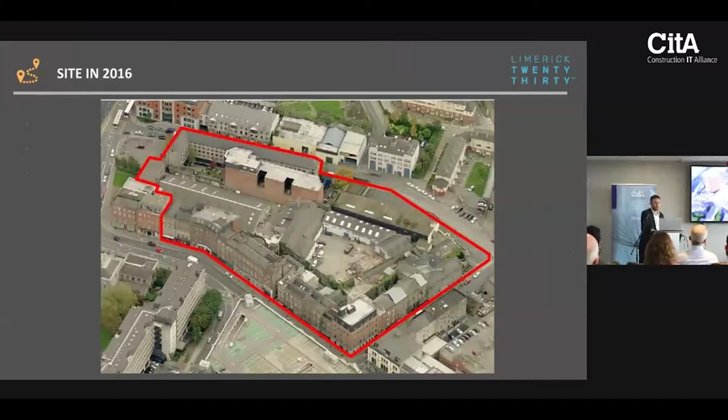In terms of how it's divided up, we're actually delivering it in 5 different contracts. The first was a demolition enabling package. The second, which is on site at the moment, referred to as Contract B, is the construction of a site-wide basement, 10,000 square meters, and a 6-story office building, about €90 million construction value. Contract D, which has skipped ahead of Contract C, is the 14-story building and refurbishment of the granary, circa 80 million. And then Contract C, which is the library, 4 Opera Square, and the public realm plaza, about 65 million. For C and D, the intent is that they would be on site by the end of the year.

Just a note in terms of funding. So where's the funding for these buildings coming from? We've got about a third of the funding of the 300 million coming from private investment.

About two-thirds is coming from either local authority or government. Effectively, it's complex — my role involves dealing with all the different stakeholders on this site.

We've got five stakeholders. We've got ourselves, who will manage the sites when finished, and we're a 50% part of a joint venture company called Treaty Stone, a partnership with the Irish Strategic Investment Fund, who will fund and own the 6-story office building. The library is the council, the granary is the council, and the 14-story building is the Revenue Commissioner, so it's a government building. Lastly, Contract E is a hotel, which takes in Quinn's Bar and a number of Georgians on Ellen Street and Patrick Street, and that's being delivered by a third party.

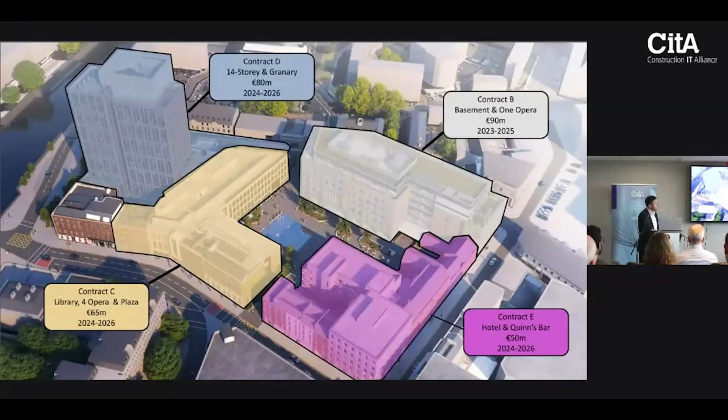So just to delve into a bit more detail — I noted I only have 15 minutes, so I don't want to go too far over, but let's look at the individual buildings, starting with the 6-story office building.

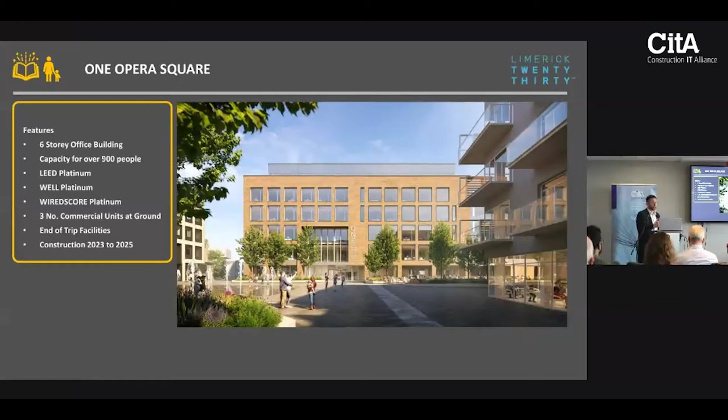It's about 10,000 square meters net and can accommodate over 900 people. We're going for LEED, Well, and WiredScore Platinum, and we're on target to reach that. We've also got commercial units down on the ground floor, level 3 of them, which activate the public realm — an important part of it. That's another visual looking across the square.

In terms of the basement, we've got 155 car spaces and 17 EV charging points, but actually full EV charging can be accommodated across the whole car park if facilitated. There's plant space and ancillary space for the buildings above, and probably three important things in terms of sustainability, showing the ambition of the development.

End of trip facilities — everybody knows we need to start moving away from cars and support walkers and cyclists. So we've got about 311 bike storage spaces down in the basement, with really high-end end-of-trip facilities: lockers, shower rooms, a centralized waste management strategy, and a goods delivery strategy.

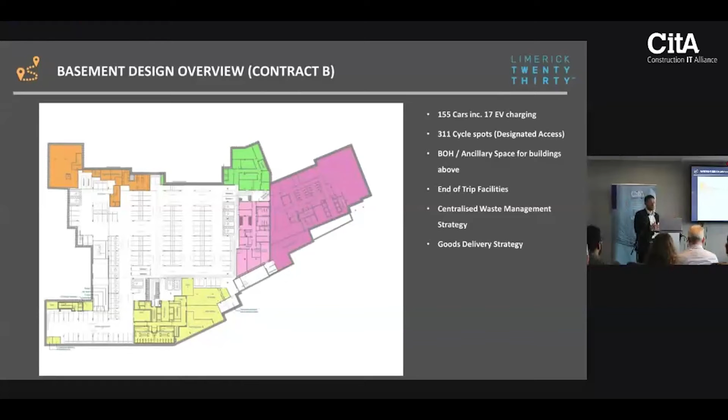From a waste perspective, we don't want bins on the street. We want them taken down into the basement, stored there for a time, then moved into the service yard so they're off-site by 6am and nobody's looking at them. Similarly, the goods delivery strategy is about mitigating congestion on the streets.

Probably just stop on the granary for a minute. It's the oldest building on the site, from the 1800s. We're keeping that building and upgrading its energy performance — replacing all the windows, repointing all the stonework, replacing the roof with insulation added, and putting in a new heating system throughout.

That's going to accommodate the council — they're going back into that building. You can see a nice view of one of the restaurants there, which has a sunken terrace outside. Anybody who frequented Trinity Rooms back in the day would be familiar with that area.

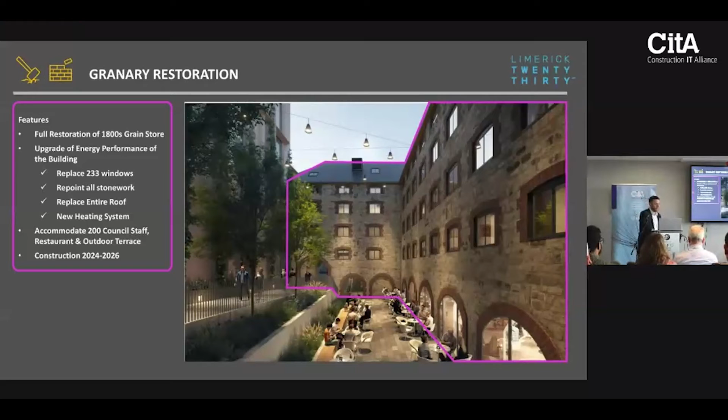In terms of the city library, it's another really good example worth touching on. We're delivering turnkey, so it's a full fit-out of that building, at 4,700 square meters — pretty big, and it's going to be one of the biggest libraries in the country.

I've got a video giving some insight into the level of detail in it. An important part of it is restoring the old town hall building, from the 1800s, and a couple of Georgian buildings, 8 and 9 Rutland Street, which have been really, really challenging.

But what we've created blends the new with the old, and the architects, Henry J. Lyons, have done a fantastic job. They're building an atrium to the rear, but it's a really impressive design, showing what you can do with a sympathetic approach to blending heritage with the new.

That whole development will have an event space for 100 people. There's community and sensory rooms in there, a cafe and outdoor terrace, and a dedicated children's area up on the second floor.

One point to make about the City Library - some people mightn't get excited about that, they think it's a place you just go to read. It's not. This is an international standard library, a place you'll want to bring your kids, or go yourself. There's recording studios in there, so it's something for everybody. This is a destination where visitors come to the city - they will want to go to this library. I think we're really proud of the design, and now it's about making that a reality.

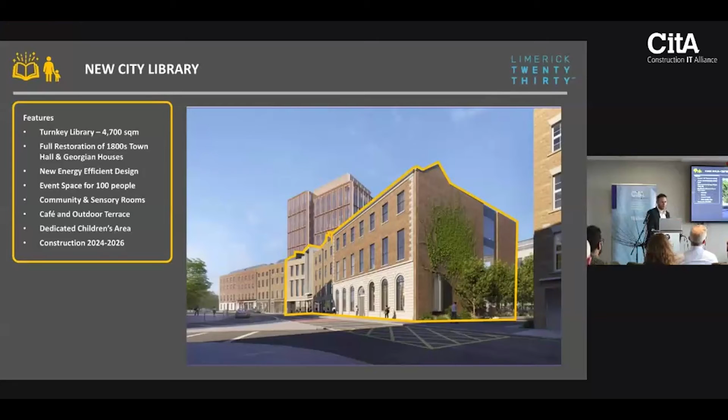Again, public realm is a really important part of it. We've got about 8 or 9 restaurants and cafes backing onto this square. It's really unique, I guess - it is an internal square. You don't get many of them in Ireland. So you will be sitting here and...

Bad timing. So yeah, it'll be a fantastic place. You'll be separated from the cars around you, and it's kind of a bit like Rome, not exactly, but a bit like Rome, where you walk into one of these squares and there's a big reveal behind the buildings. You don't really realize what you've got until you walk in there. So we've got lots of planter beds, lots of places to sit and enjoy the space.

One of the key features - we've got a mirror pool. Anybody that's been up to Dundrum or over to Granary Square in London has seen this - a thin layer of water with playful jets, synchronized with music and lights. That's just an attraction to animate the space.

But an important part of that is it can be drained down, and we can use this space for concerts, for markets, for outdoor cinema, and it's actually earmarked as a fan zone for September 2027 for the Ryder Cup as well. This is the part of the scheme that really excites me and excites Limerick 2030, and it's one the public should look forward to.

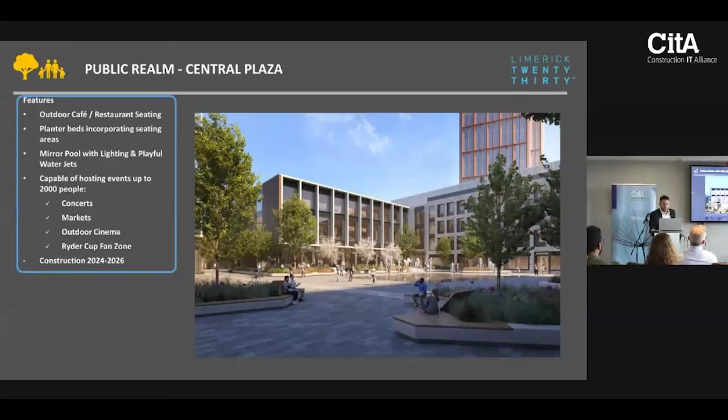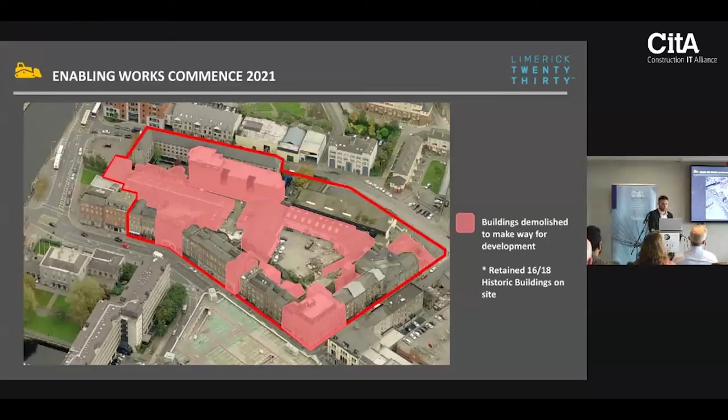That was the works - work started in 2021, and by the end of 2022 that's how the site was looking. An interesting fact: any demolished material was crushed and spread across the site, about half a metre of it, as a capping layer to give a clean surface to start on, and it's since been used for piling mats and other uses. So we tried to divert from landfill, which was pretty successful in that first part of the project.

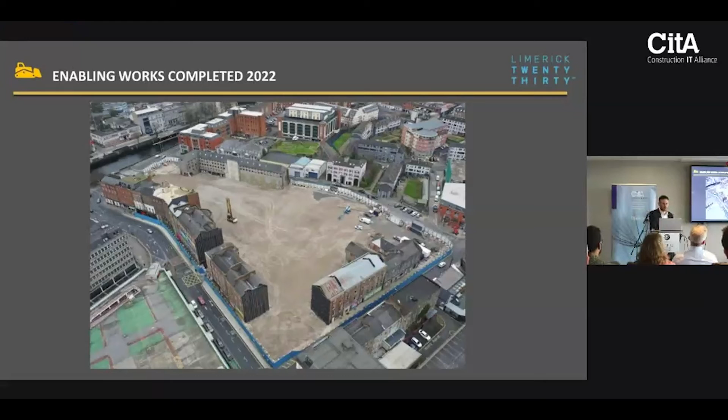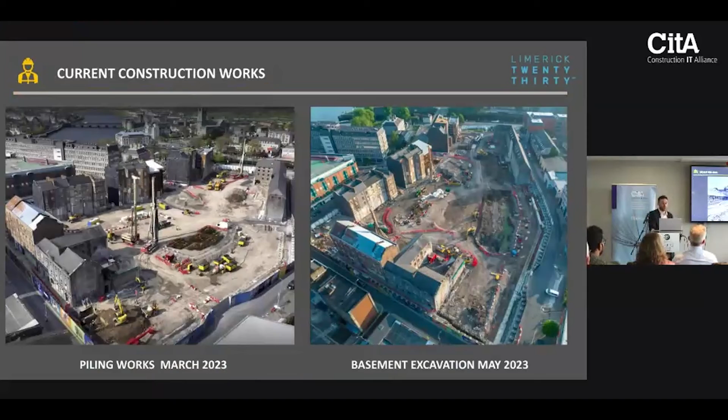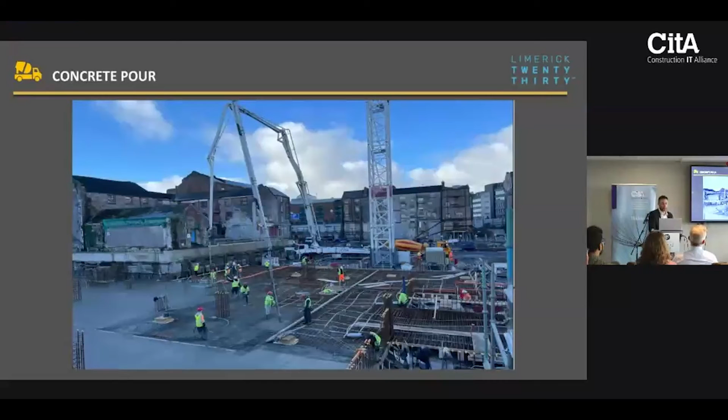That's just a view of the secant perimeter wall, which is about 4.5 kilometers across the site. That's a view of a concrete pour - we've got a post-tension slab across the basement slab and podium slab. A huge logistical challenge for the contractor to deliver - there was about 900 cubic meters of concrete poured in one day.

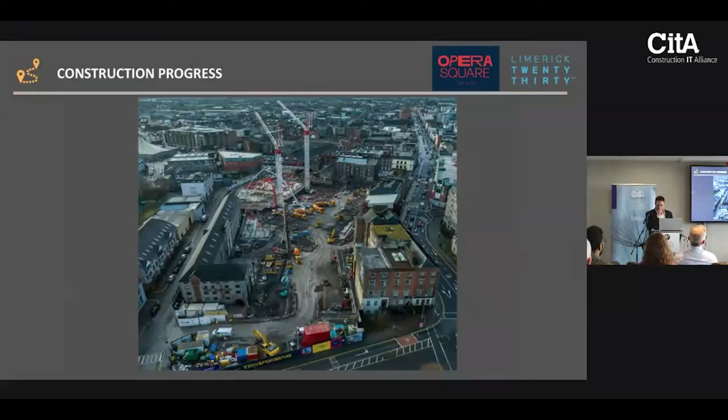We've got a local provider, O'Connell's, bringing the concrete in from 6 o'clock in the morning till 3, then floating it off - we've had people down on site at 3 o'clock in the morning floating off concrete. So, pretty successful so far, and that just gives you an idea of the level of activity.

So in terms of what we've actually completed on site, we've got 4.5 kilometers of basement perimeter piling done, over 800 piles. We've got most of the bearing piles underneath the buildings done, and about 71,000 tons excavated from site, which is about 70% of the site.

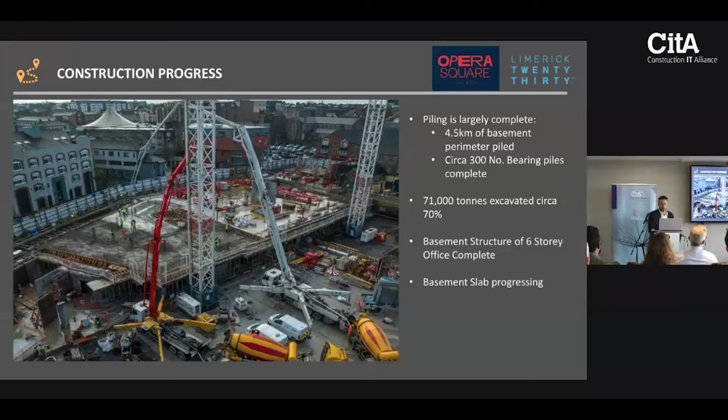We've completed the basement structure, which is the basement slab and podium slab of the 6-story office building, and that was an important milestone for us as it triggered the investment for the superstructure above. We're now progressing with the basement slab and podium slab for the rest of the development and subsequent contracts.

So I just put in a couple of slides here in relation to sustainability. I'm by no means an expert on this stuff, but just a couple of things - we mentioned the existing buildings. In terms of resource and waste management, we did a pre-demolition audit, which gives an idea of how we're tracking waste. We're segregating material on site, creating waste logs, and reusing material.

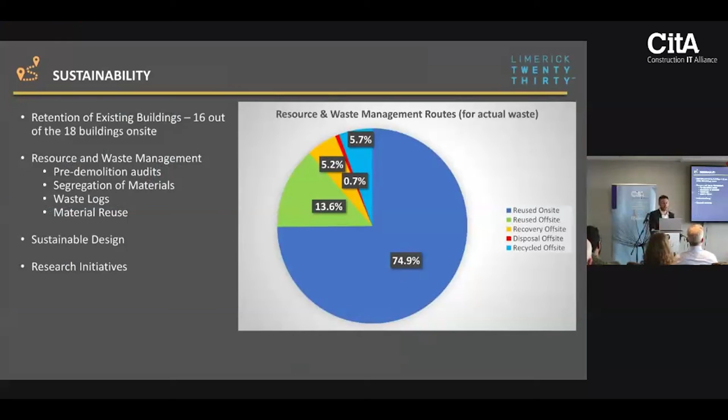Sustainable design - I've probably touched on a few of those, and research initiatives I'll just skip through since Peter's given me the hurry on. In terms of design, just a few key things about building energy performance and efficiency, and carbon reduction.

One of the key things we changed was from in situ concrete to PT. We saved about 2,000 tons of steel and 2,000 cubic meters of concrete. So that's just an example.

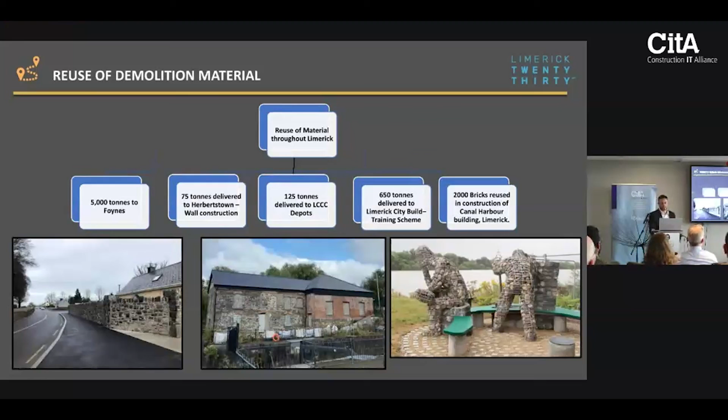Another one is around raw materials - the specification in terms of responsible resourcing of materials and EPDs, so sustainability is embedded within the design. That's an example of reuse of materials - we've transported 5,000 tons off-site to Foynes for reuse, 75 tons went to Herbertstown to construct a wall, and 125 tons went to the council depot. So we're trying to reuse as much as possible.

Just to note, there's a couple of research projects - we've got 2 with the EPA, a joint venture with the Irish Green Building Council, and we're in collaboration with ATU, LTT, and the Southern Region Waste Management Office. There's a master's student sitting in our office who's going to assess pre-construction, construction, and operation. So that's just an idea.

Last but not least, in terms of digital technology - maybe people in the room are interested - it is a full BIM project. We are delivering LOD 500, so it would have gone to market at probably LOD 2 or 3, and now it's the CISC's responsibility to bring it to LOD 500. The top right hand side gives you an idea of the level of coordination, and the benefit of that will be in ensuring it improves program.

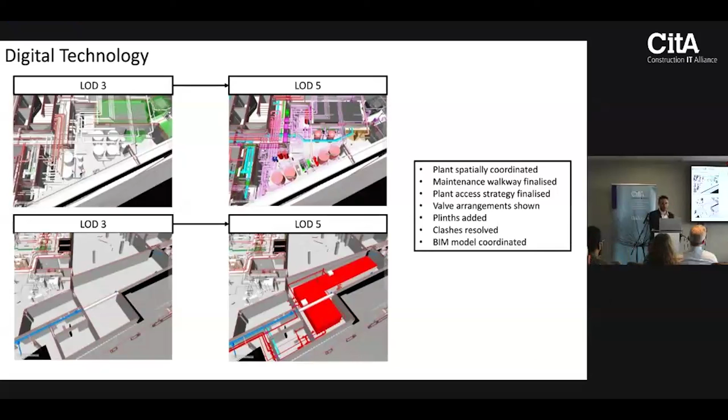We want no abortive works, which is on site at the moment, so that's where the benefit should come through. Within the basement, we've got clearance zones for delivery trucks and the like, and within the model, model planes are set up, and clash detection is done to make sure the designers are working within certain spaces.

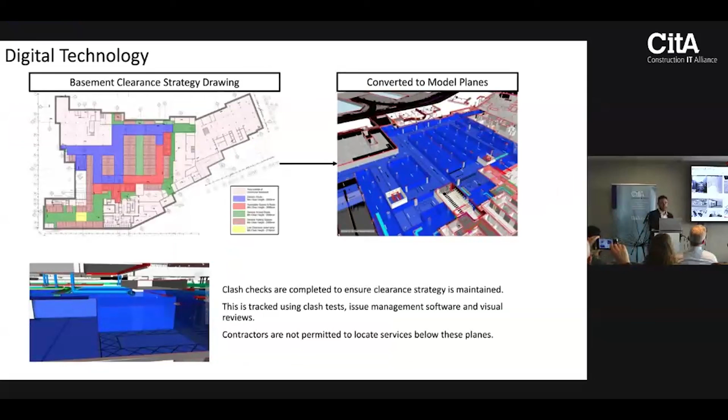And just a couple more - Paul, do I have a couple more minutes? Gone over? Quick.

All right, so again, just how we're using technology on site - we've got BIM Compare, comparing the actual to the model, and live checks on excavations and live contours. Probably an important part of it is that we also use the BIM model for logistics and work sequencing - that's the 4D synchro - and also renders for promotional and marketing materials.

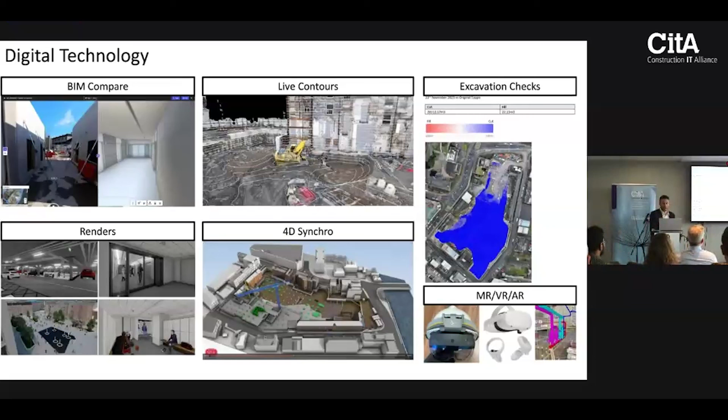So I've got one video. I'm going to skip ahead and not show this one. I'll show this one instead - this gives you an idea of the 4D synchro effectively.

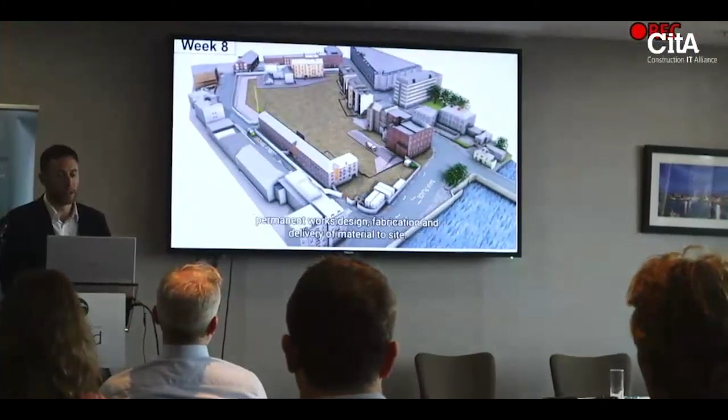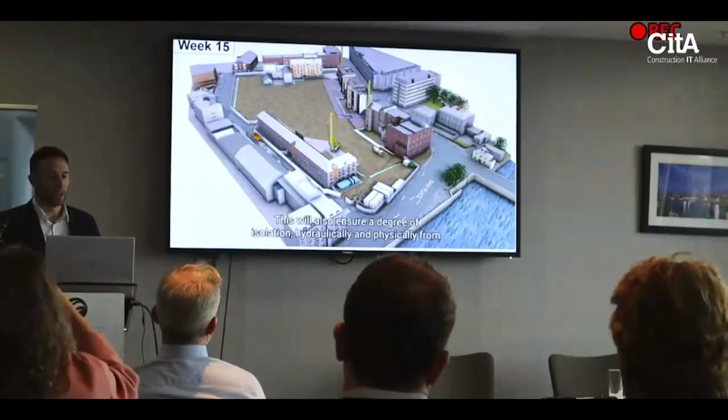We're asking all tenderers to provide logistics and work sequencing, to give us an understanding of how they're planning their methodology for the works. Given the complexity of the site and the follow-on contracts, we needed a clear understanding of how they were going to go about doing the work. So this gives you an idea of the power of that type of technology.